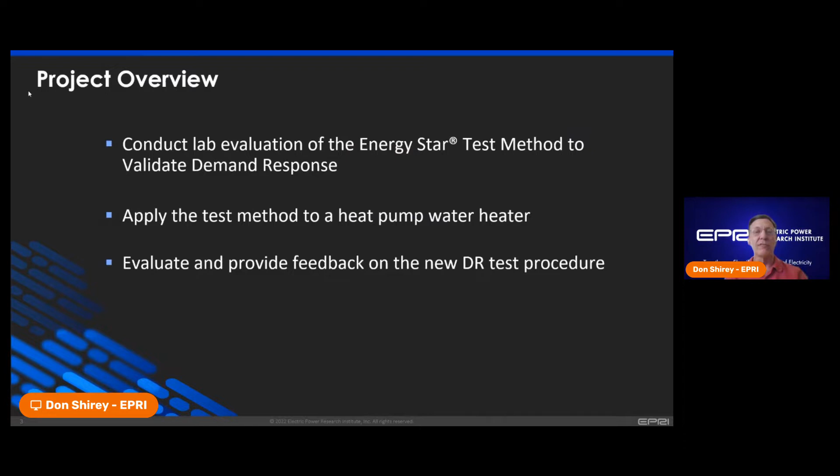So if you look at the DR test method, it has 8 sections: an overview, applicability, definitions at the beginning. It defines the test setup, the water heater preparation, and then the demand response test. There's an initialization test, user interface check, consumer override, loss of connectivity tests, demand response requests and responses to a load shift and an emergency curtailment and a grid emergency test. And it checks for DR information and messaging coming back. There's some calculations to be performed, and there are references in section 8. So it was released last April 2021, and was effective this past January.

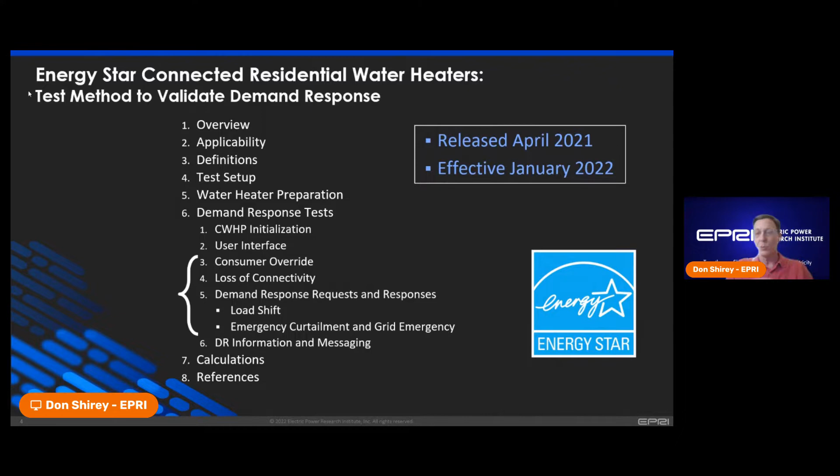So I'm going to focus here on section 6 and then the subgroups override, loss of connectivity, and demand response. That's what I'm going to focus on presenting today.

So the test setup: we installed a 40-gallon heat pump water heater in our psychrometric chamber per sections 4 and 5 of the test method. And it did require a mixing valve. So this is something a little bit different that is required for this testing.

We used EPRI's own CTA 2045 simulator, which is an AC form factor shown in the figure on the right. And then we actually run computer software on a laptop that communicates with this CTA 2045 device and sends the signals properly to the heat pump water heater.

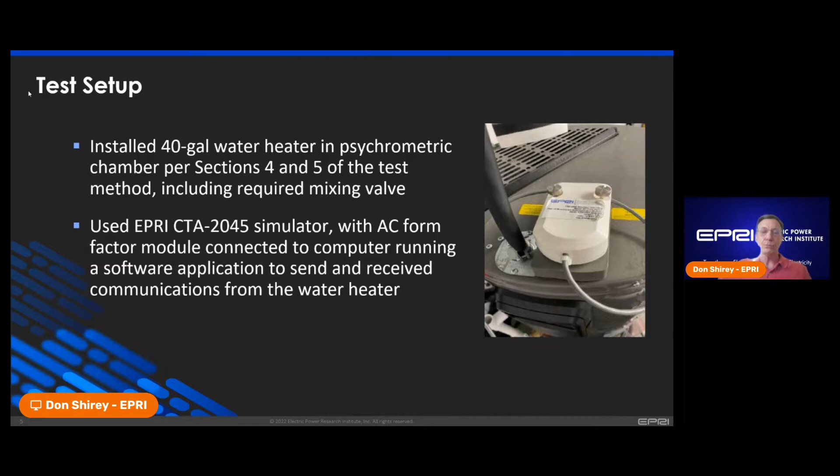So customer override. The test procedure states that the override shall be limited to a duration up to 72 hours. Now, the interesting thing is there's really no verification step in the procedure for this. It just says it shall do that. For the heat pump water heater we tested, the consumer override lasted 24 hours. So instead of the 72, it was 24, but the requirement was up to 72. So everything was fine with respect to the procedure.

And again, I think there's a lot of discussion in the industry about what that should be. Having it override and last for 3 days seems quite long. From an electric utility perspective, they normally run demand response requests, could be daily, could be Wednesday and then Thursday, and then if it's still hot, again on Friday. So having a 72-hour opt-out period is pretty long, and I would recommend it be 24, which is what the manufacturer of this product did.

So there was loss of connectivity as well. What it says is 15 minutes without connection during the DR event, but there are different categories. If the loss of connectivity is during a DR event with a set duration or end time, then the product can complete the DR event and return to normal operation set by the customer. If you don't have a set duration and end time, basically resume normal operation within half an hour.

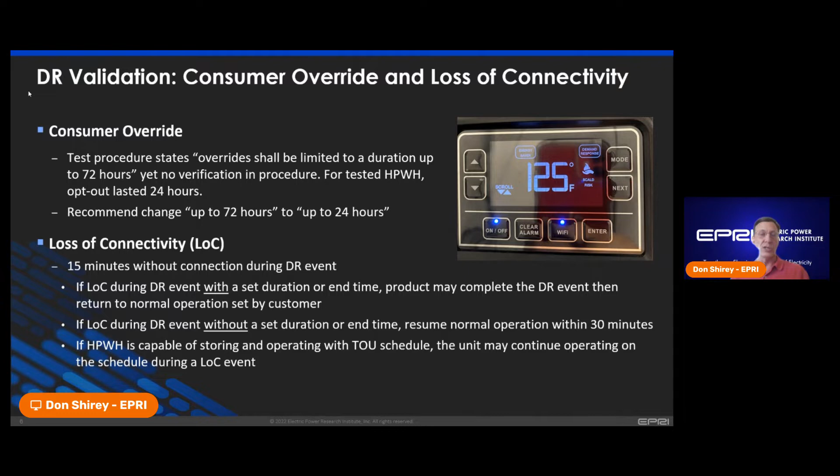So what we found was a little bit of ambiguity regarding removed connectivity. It's written up generically, so it allows for multiple connectivity pathways. But the question is, is it a loss of communication by lost internet connection, or did somebody pull out the CTA 2045 module from the water heater, or did it get loose and fall out? So what are we testing for? We could test for both, but right now they're pretty much testing for it as if it were loss of internet connection.

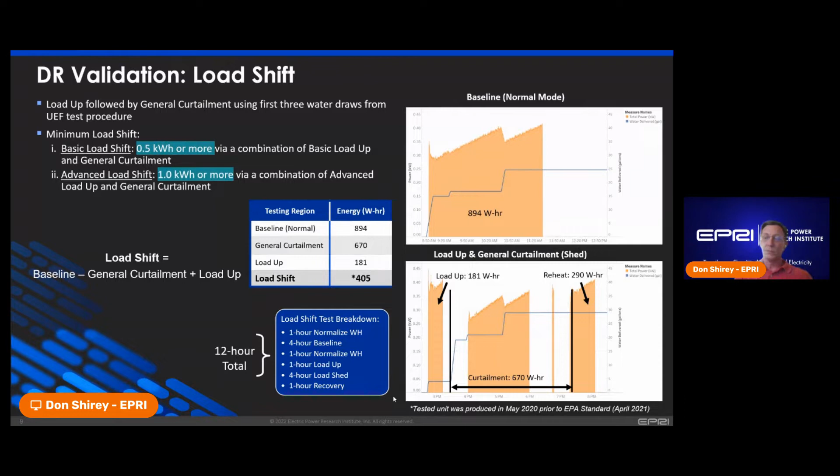This graph is similar to the other. The power is the orange shaded area, and the blue line is the cumulative water draw. And so we started out with an emergency curtailment where the unit seemed to reduce the set point significantly. The electric elements did not come on. And so it definitely met the requirement of no resistance element operation.

In grid emergency, you can see with the red arrow there was no consumption. So it did exactly as it was told: don't do any consumption for that period of time. The whole test took about an hour for this one. So it wasn't an extensive evaluation as compared to the load shift test, but it did prove out the functionality.

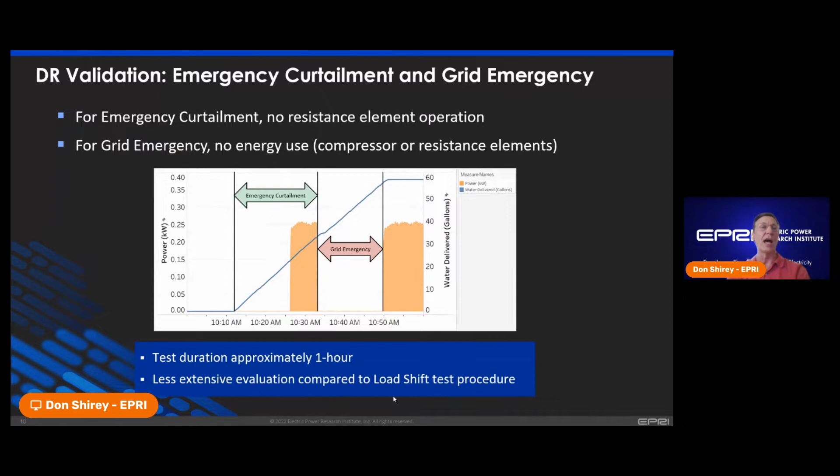Okay, so recommendations and conclusions. So for the consumer override, again, I think this has been something that's been around for a while. Space conditioning equipment normally changes the set point temperature as the method to trigger customer override, in the absence of a dedicated override button. So this particular device used a different keystroke to invoke consumer override.

So the suggestion would be to either have a dedicated override button that's easy for the consumer to see, or maybe change the set point temperature so it aligns with other devices in the house that are using customer override by that temperature change method. I talked about it earlier. I would recommend reducing the maximum override duration from 72 to 24 hours.

In terms of loss of connectivity, we really need to distinguish between the two cases, whether you're losing internet connection or if the plug-in module actually comes out or falls off the device. We need to reconcile the inconsistencies that I noted earlier regarding loss of connectivity during a DR event without an end time, and we need to correct that one typo on step 12.

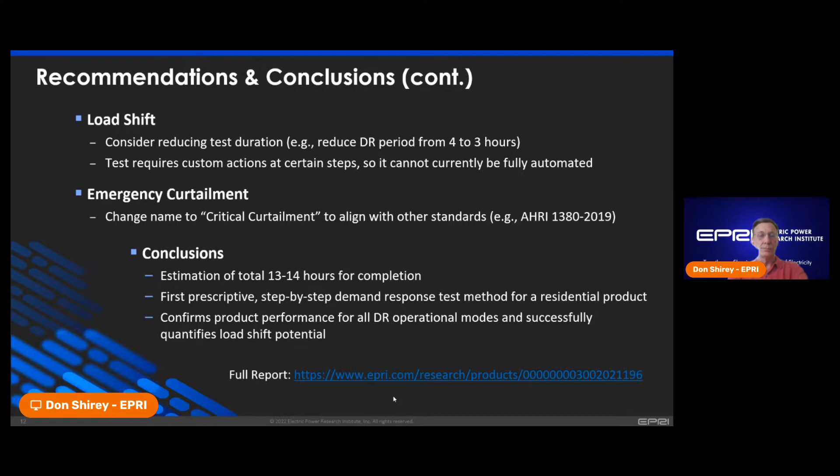This is quite insightful, a dynamic place in the water heating world. And I would take this opportunity to mention that AHRI is also working on a water heating connectivity standard as well, and that's the 1430. And there is alignment in a lot of places. And in fact, Abby Daken with Energy Star is participating actively in that standard. So great evaluation, and good to see that we're getting some good alignment on load shifting capability.

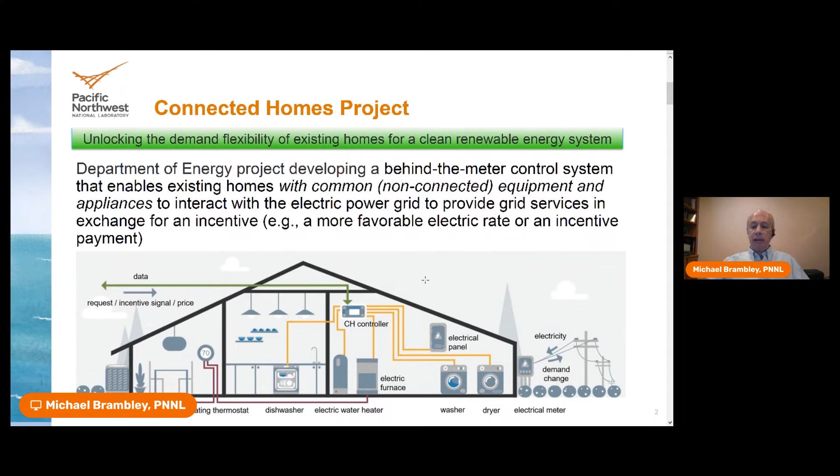Some of the key drivers behind the project overall are we're seeking the lowest possible total cost solution. So that includes installation, not just the first costs. To accomplish this, we do things like automate system setup and configuration. This reduces the time that an installer needs to be in the home. We also minimize the additional number of sensors for the control. And again, same purpose. Our solution accommodates each household's preferences for comfort and convenience. And our control automatically captures the unique characteristics of each home and its appliances. The reason for this is if you capture the characteristics of each home, you squeeze out as much as possible in terms of demand response.

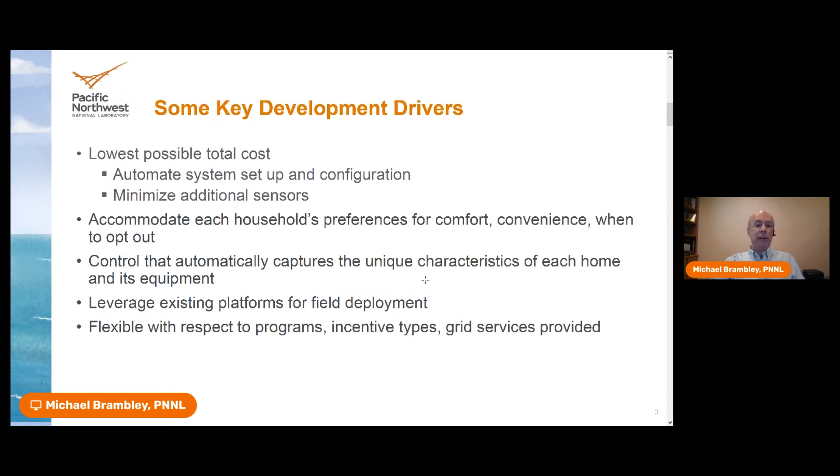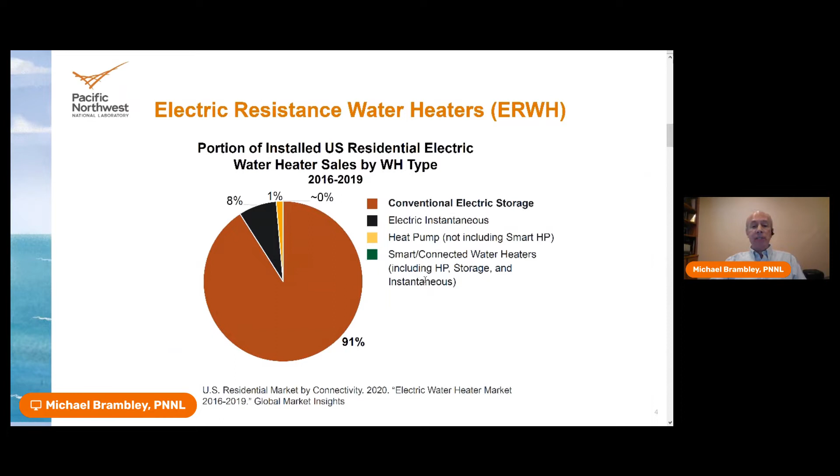And in deployment, we plan to leverage existing platforms so we can spread the cost of the platform over multiple applications. And finally, our solution will be flexible with respect to programs, incentive types, and to some extent, grid services that are provided to the grid. As most of you probably know, electric resistance water heaters represent about 91% of all electric water heaters. We expect that heat pump water heaters will rapidly catch up on this.

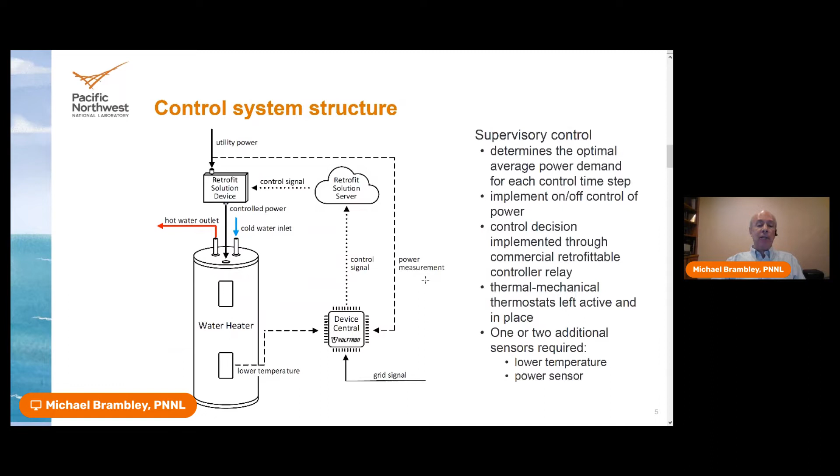So our control system structure is shown here. I want to highlight a couple things. There's something in the bottom right called Device Central. This is generally a Raspberry Pi where we run our control algorithm. It accepts a signal from the grid. As you'll see, we will focus on price signal, but we can also have a direct request for a certain amount of demand reduction. We also use a retrofit control device that serves as our interface to the water heater. And by the way, if I didn't mention it, we're focusing on electric resistance water heaters. The one that we're using includes a power measurement, and it's from Shifted Energy.

We only use one temperature measurement, the lower temperature, and we found that sufficient for controlling the temperature available to water draws. The method of control we use is Model Predictive Control, or MPC. It's a data-driven approach. It uses optimization, and in this case, we optimize to minimize over a time horizon. Our time horizon is 24 hours, and we used 5-minute control time steps.

24 hours may be longer than we need, but that's what we've been using so far. And the reason we have a time horizon is to account for future water draws, so we can plan how best to use our energy. So we minimize the total price or total cost of energy, price times energy, plus a penalty for lower temperatures than permitted. And those temperatures are established by these conditions that the optimization is subject to.

And we determine the amount of energy for that time step based on this optimization. We have upper and lower bounds for energy. We have upper and lower bounds for temperature, which reflects the comfort of the water. And then finally, although we do this optimization over 24 hours, we only implement the result for the very next 5-minute time step. Then we do another optimization for the following time step, and so forth and so on.

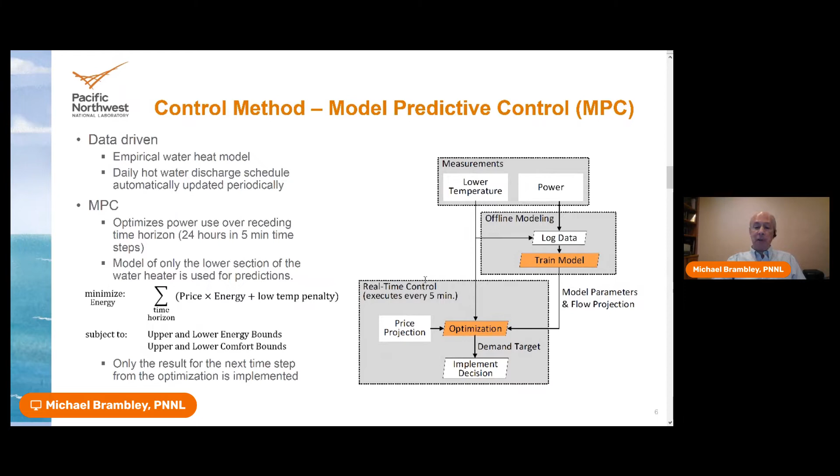This is our water heater test bed. Diagram on the left, a photo of part of it on the right. There's two things here that are different than the deployment system. We have an additional temperature, the upper temperature, and we have flow control. And if you've run tests on water heaters, you have, I'm sure, controlled the flow, and that's the purpose of the box on the left.

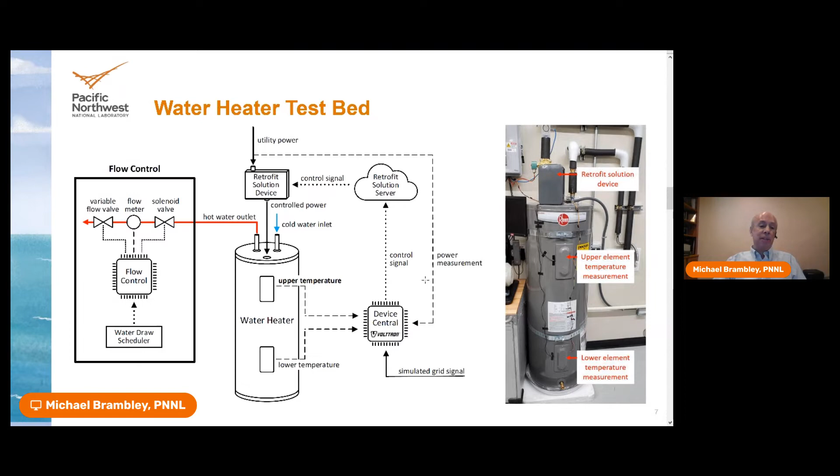I'm going to jump to testing results next. Before doing that, I want to just point out that the results we'll be looking at are for the two 24-hour price profiles here. The upper one is for a time of use rate. The peak period is from 4 p.m. to 11 p.m., a 7-hour peak period. The off-peak price is 8 cents. The on-peak price is just a little bit over 16 cents per kilowatt hour.

On the bottom, we have a 5-minute real-time price. We're looking to the future to see how the control will behave for this case. We're using data from ComEd from their 1-hour real-time price program, but they publish data at a 5-minute interval, and that's what we're using here.

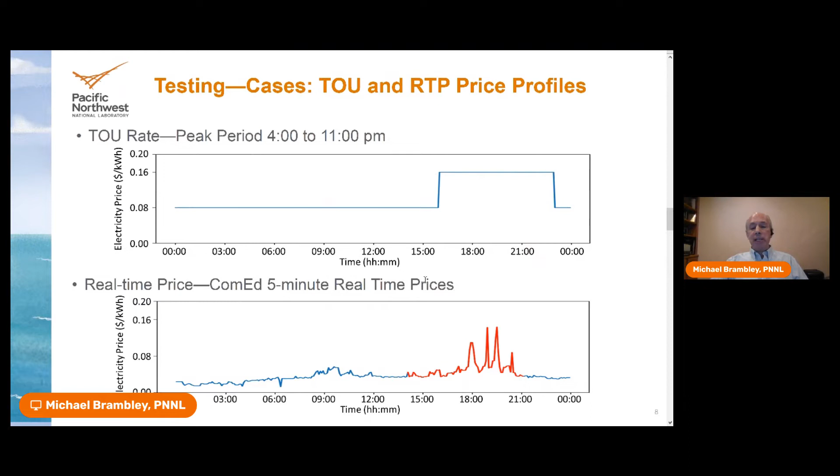The red portion of the plot of prices is a 7-hour period that has the most variability in price during the day. So we use the same length of time as the TOU peak rate period, but it's shifted a little bit because we wanted to capture this period of greatest price diversity, assuming that it represents conditions on the grid and the time at which response would be most valuable.

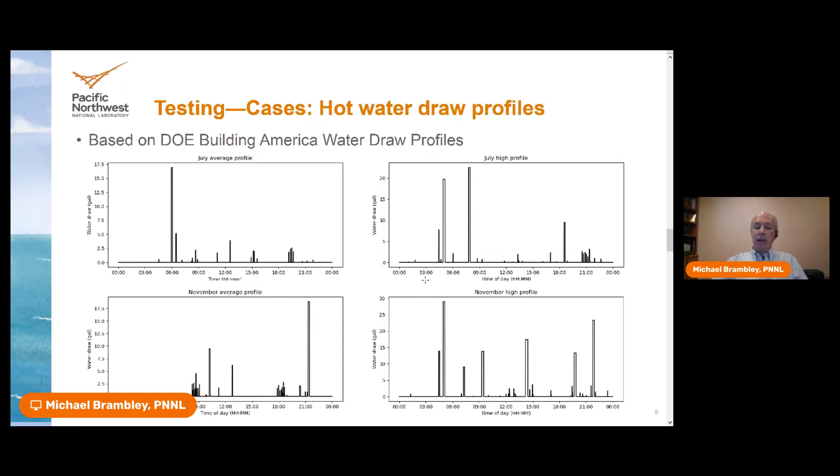We use 4 water draw profiles, one based on July, which has the lowest, I believe, annual total water consumption for the location considered. We base these profiles on the DOE Building America water draw profiles. And we also use November, which represents either the highest consumption or the second highest consumption of the year.

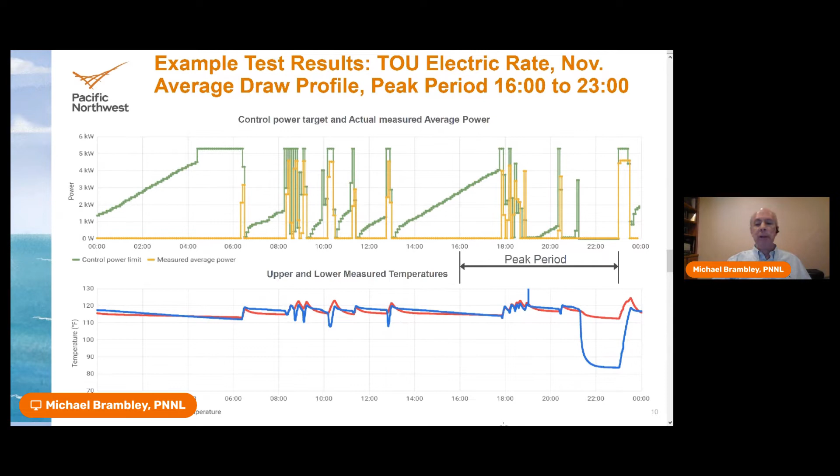You can see that also remains relatively high, except near the very end of the peak period when it drops significantly. And the reason for this is it's trying to squeeze out as much reduction in demand as possible right up to the end of the peak period. And then it's followed by a recovery period. We let it recover immediately, but that could be controlled.

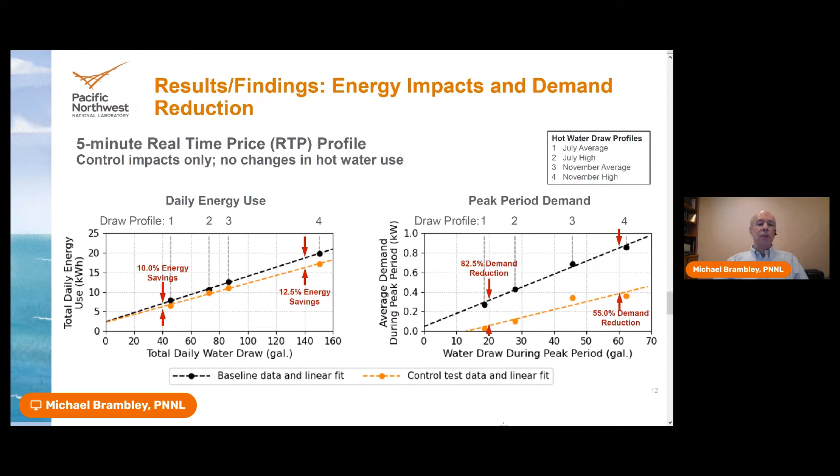Now let's take a look at the results for the real-time price. Looking at energy on the left, I just want to highlight the energy savings. In this case, we get a little bit more significant savings, about 10% at a 40-gallon total daily water draw, and a little over 12% for 140-gallon water draw. The magnitude of the energy savings is larger at the larger water draw, as you might expect.

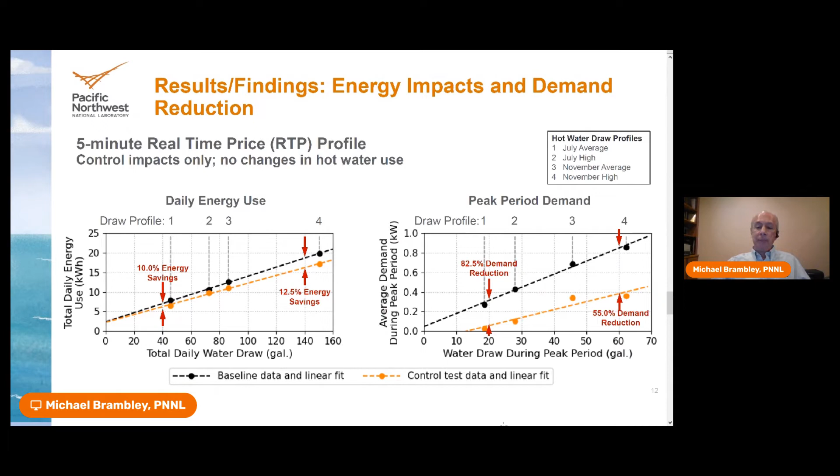On the right, same plot as on the previous slide, but with this particular case, at a water draw of 20 gallons during the peak period, we achieve over an 82% demand reduction, and out at 60 gallons during the peak period, we achieve 55% demand reduction. So a little bit more than the time of use case.

Other factors that we've investigated are listed here. The first is that the previous results have the actual water draw being identical to the predicted water draw. And this is to account for actual water draw deviating from day to day somewhat. When we did these tests, we found that the difference in the ability of the controller to provide what we wanted was very, very small, much smaller than we had expected. Other things we've tested is a 3-price tier TOU. We also have looked at updating the water draw profile. This is the one that's put into the controller once a month, beginning of a month, using the last week of the previous month to learn a new profile.

Mike, I just want to give you a 2-minute warning if I can.

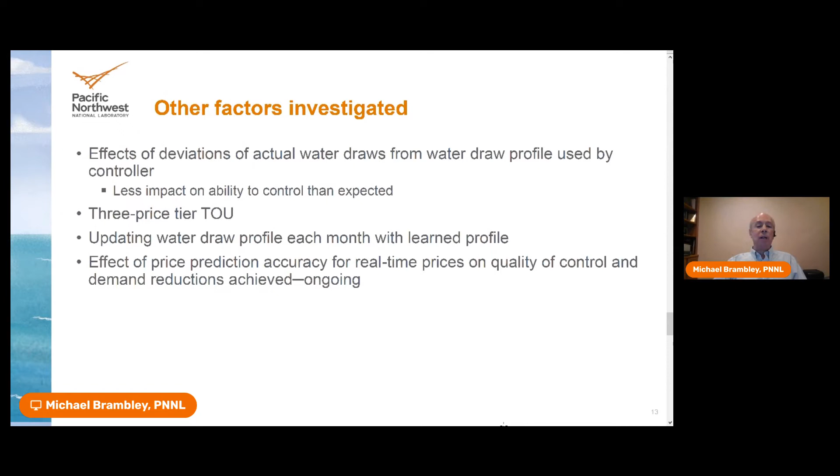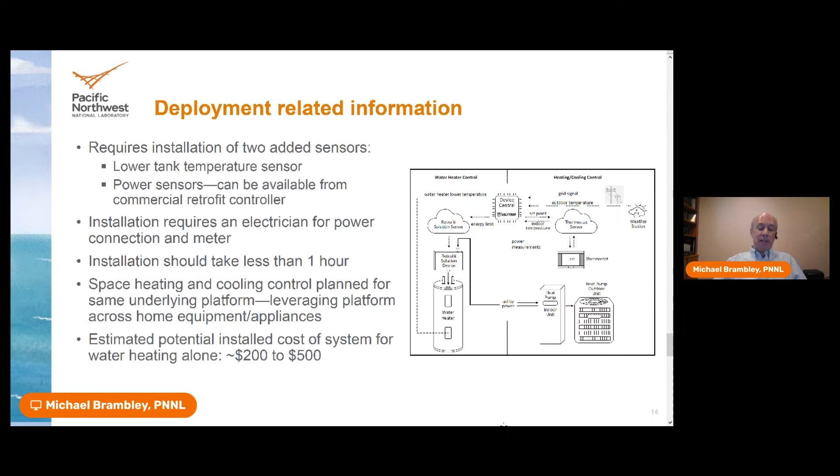Okay. Great. And we're also looking at the price prediction accuracy for real-time prices on the quality of control, and this is ongoing. Some deployment-related information. It requires 2 sensors, a lower tank temperature sensor and a power sensor. The power sensor could be provided by the retrofit control device that's used as the interface to the water heater. Installation, as you would expect for a water heater, which are generally, not always, 240 volts, requires an electrician, but the installation time should be less than an hour. And we can also share the platform with space heating and cooling, and actually others. And we have a diagram on the right-hand side showing that configuration. And finally, we've estimated the potential installed cost, because we don't yet have our final design developed, at somewhere in the range of $200 to $500.

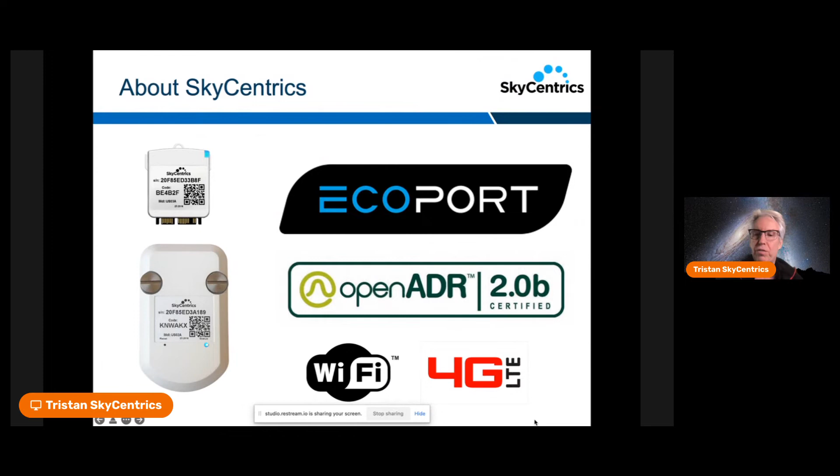SkyCentrics makes Wi-Fi and cellular CTA 2045 EcoPort modules, and we help companies get EcoPort certified and OpenADR certified. So here's the new EcoPort label for those of you who haven't seen it yet. Very exciting. Don will be talking about the branding and how that worked. The goal of this presentation is to help everybody get as many products onto the qualified product list, water heaters, obviously, but eventually pool pumps and others.

So I'm going to be going over the certification process, certification documents, and some white papers are going to be hosted at these areas as well. One on security for the EcoPort, some sample utility programs, and then how OpenADR and EcoPort work together. We're very excited that we're being hosted by the OpenADR Alliance because, as you know, historically, there's been some confusion about OpenADR and CTA 2045. Are they competing? And so we're excited to be hosted at the OpenADR and showing how we're working together.

And for those of you who are a little less familiar, the key difference is that the EcoPort is a hardware standard. You must have an EcoPort on your machine and have it be able to respond to certain software commands. The OpenADR is software only. And we believe that it's critical for both long-term future-proofing of connectivity to an appliance to avoid stranded assets, as well as if a manufacturer is going to only choose one way of communicating, typically it's going to be Wi-Fi. As you know, there's some tricky parts about Wi-Fi, so it's important to have other options, and that's what the EcoPort does. You might have cellular, power line carrier, etc.

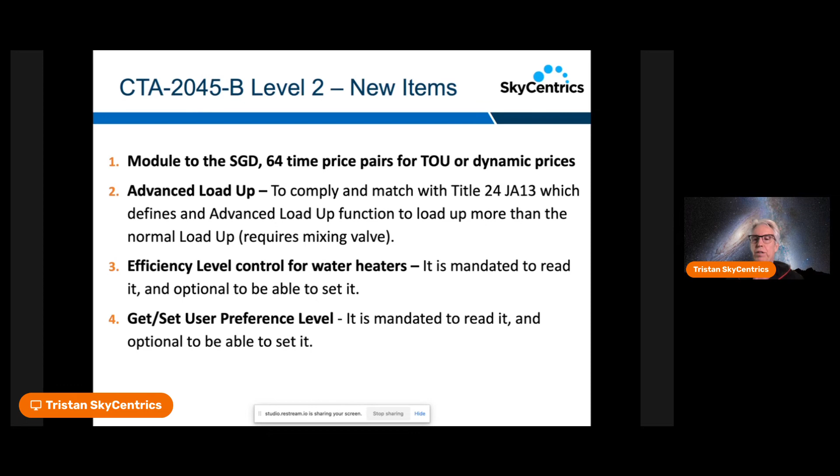And I want to make sure I leave enough room for questions and to speak with Don, and for Don's presentation and Don's introduction. So Jeff, I'm going to move it over to you. I think I'm going to be pulled out of the screen, and Jeff, you'll take over.

Great. Thank you, Tristan. I think it's really important for us all to understand that this is quickly changing, but it's getting pretty legitimate. CTA 2045 is a physical standard, but it's also a communication and command structure standard. So there's some fun things, and it's going to allow utilities to integrate renewables in a very simple and straightforward way.

So our next speaker is going to be Don Dulchinos, and he works at the OpenADR Alliance, and also has been very instrumental in developing the EcoPort branding, logo, and utilization.